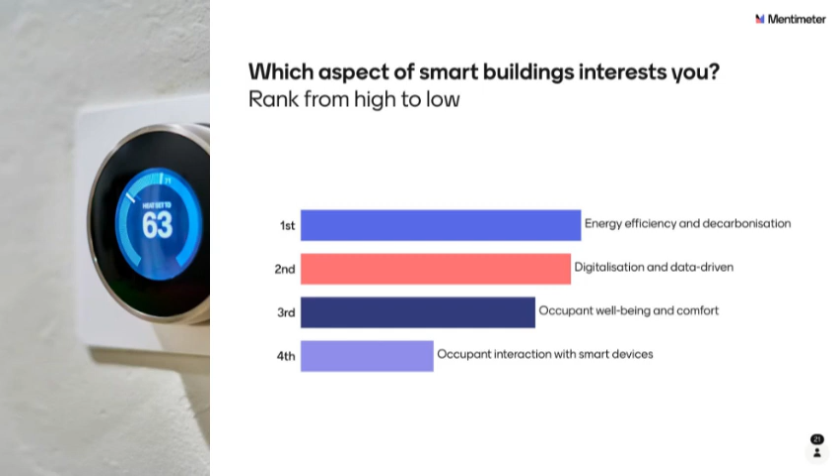Okay, I see 21 people answered the poll. In any case, the first position is for energy efficiency and decarbonization, which is quite expected, at least from my side. The last part is occupant interaction with smart devices, which in any case should be taken into account by our project. And of course, digitalization and data-driven solutions are at the second place as for your interest.

Okay, thank you. Then we can move to the next question: what is, in your opinion, the biggest challenge in making buildings more energy efficient and smart?

We can already say that cost and technical knowledge are the most important aspects to take into account, and the biggest challenge in your opinion. Of course, the impact and barrier of the initial cost is something important to consider. I said at the beginning that there are millions of buildings across Europe that could be digitalized, so this could represent a very important starting cost and barrier. But technical knowledge is also quite important in addressing digitalization. Today we are going to address this mainly, the technical aspects, but of course taking into consideration the costs of interventions.

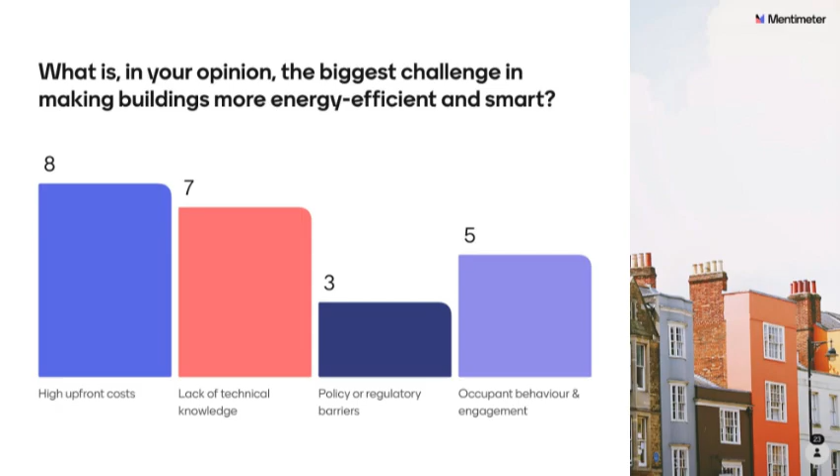Okay, next and last question for you: have you ever implemented smart technologies in a building project? The answers could be: yes, extensively; yes, but only in pilot projects; no, but I'm planning to; or no, I'm here to learn more.

Okay, we reached 23 voters. So this is the situation: we are still working and piloting these solutions, not only in our 3 projects, but I suppose in many others that you are participating in.

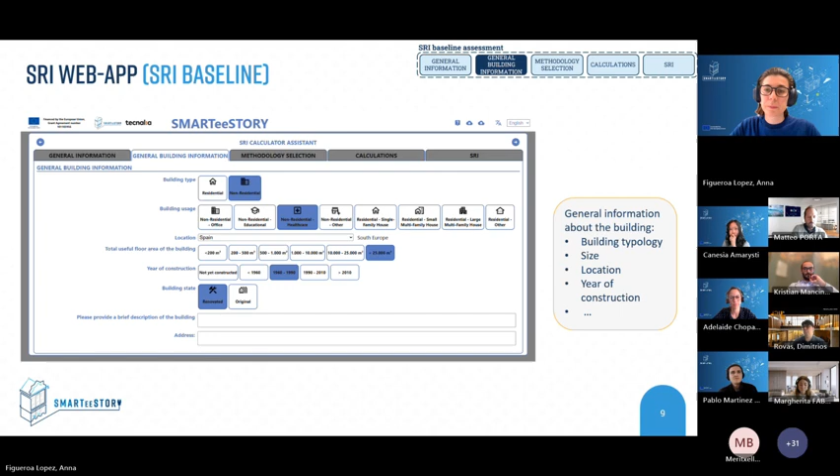Then the user has to select if the domains that are part of the SRI methodology are present in the building or not, and if they are also mandatory or not. Next, for each domain, all the Smart Ready services are filled based on their main functionality level and share of the building that is applied.

Finally, the overall SRI score is shown by the total SRI, its class, key functionalities, impacts, and domains. This facilitates the full interpretation of the SRI score. From here, the user can download a full report showing these results, as well as directly go to the next module, where the generated proposed solutions are.

Here, the second module includes this novelty part, where the refurbishment strategies to improve the SRI score are integrated. The web app loads automatically the scores and information from the evaluated building in the previous module, the baseline. The domains are then automatically sorted from lower to higher scores, so it facilitates the user to focus on which domains could improve the most.

And instead of all 7 impacts presented in the SRI methodology, they are grouped as key functionalities: building, user, or grid. From here, the user selects their own preferences on what impacts and domains to focus on to generate the proposed solutions.

In this tab, it shows all the possible solutions that increase the SRI based on the user preferences. From here, the user can create as many scenarios as they want with the same preferences. Then they must select those solutions to evaluate the new possible SRI.

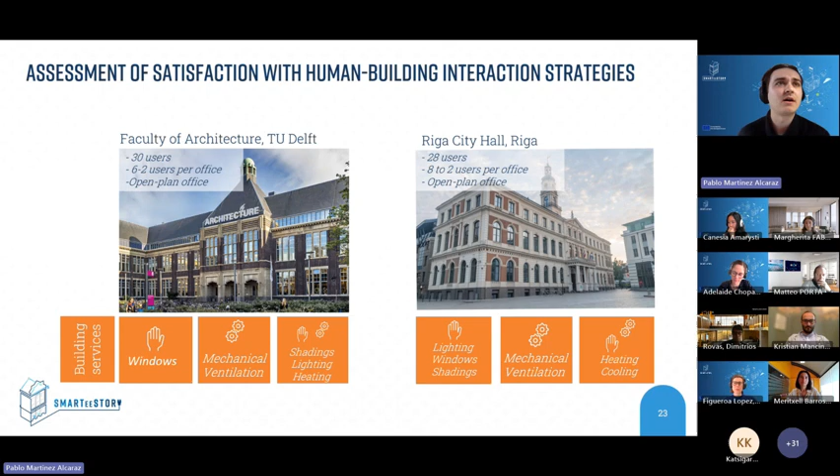In our case study, we did a questionnaire asking occupants to rank their satisfaction levels with indoor environmental quality, personal control, and automation for different building services, and how different influencing factors might be affecting that satisfaction. We looked at access to control, the inherent preferences occupants have, and the social norms and dynamics that might happen in a shared office space.

With this framework, we were able to see that satisfaction with automation is highly linked with access to control, and we observed this in both demo sites.

Another insight from this study is that satisfaction with personal control is highly linked with social norms—dynamics like democratic approaches that sometimes happen in an office space to select the set point of the thermostat. So those dynamics are the ones triggering satisfaction with personal control.

In this case, we might think about gamification strategies or other smart approaches to find an agreement for interacting with building services.

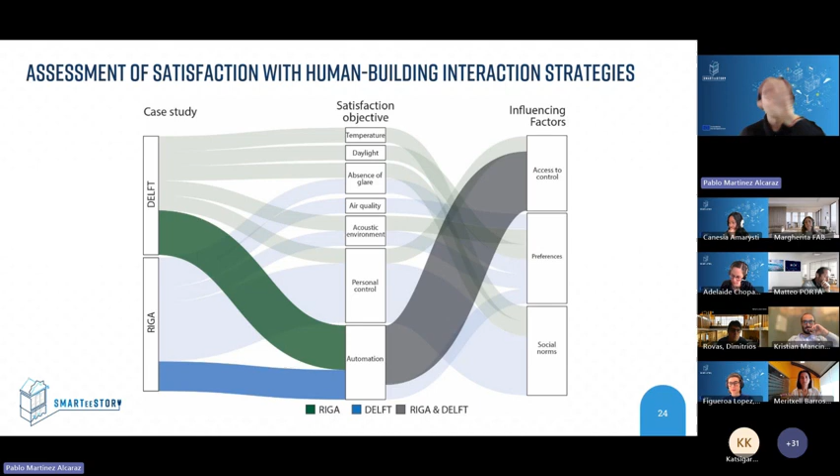So in this part we focus on human-building interaction with interfaces. The other aspect we tackled in the project is how the automation—the control logic that controls building services—is aligned with users. Because if we are optimizing for energy and comfort, and the occupant tends to override the system, we might lose those objectives. So we want this control logic to be aligned with occupants.

This is just a diagram of how control logic works, but I saw that many of you are familiar with these technologies. So let's say we have sensors, actuators, and building services, and then a controller which has some policy design, which can be designed by an engineer, a technician, or by means of AI itself, in order to take actions in the space to improve energy efficiency and comfort, or whatever aspects you want.

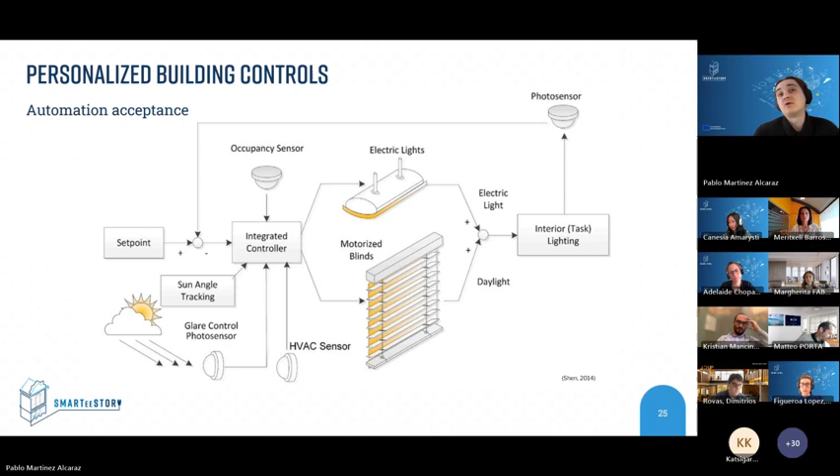Just to show you briefly a study we did: in an office space we might face many different occupant needs, different people with different requirements. So we tried to test if some of those requirements were similar to each other.

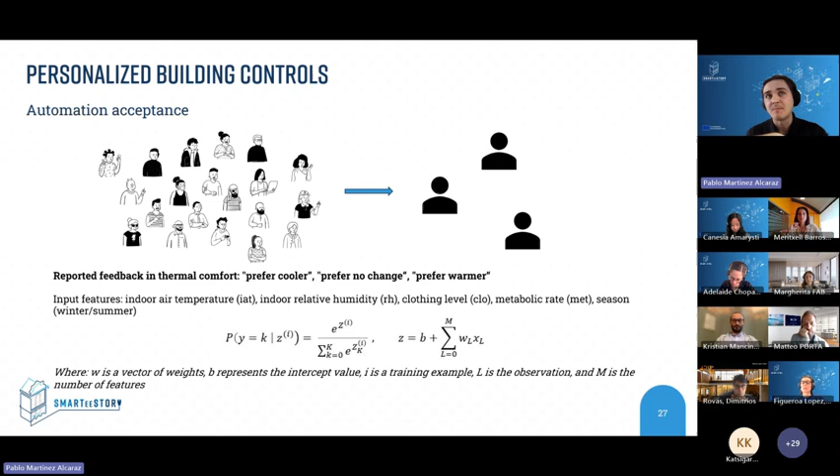We fitted personalized comfort models to see how people had similar thermal demands, and identified groups: the people who are always feeling warm—let's call them the frost followers—the neutrals who are always okay, and the heat handlers, the people who are always cold in the office.

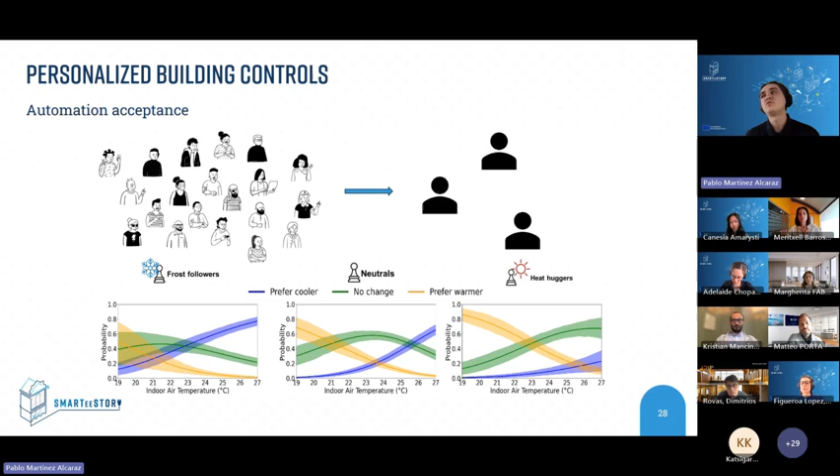So what can we do with this information in a control logic? This is what we tested: a control logic able to identify those three kinds of people instead of treating all thermal responses in an aggregated manner. We ran a simulation to test how this would perform for thermal comfort and energy consumption.

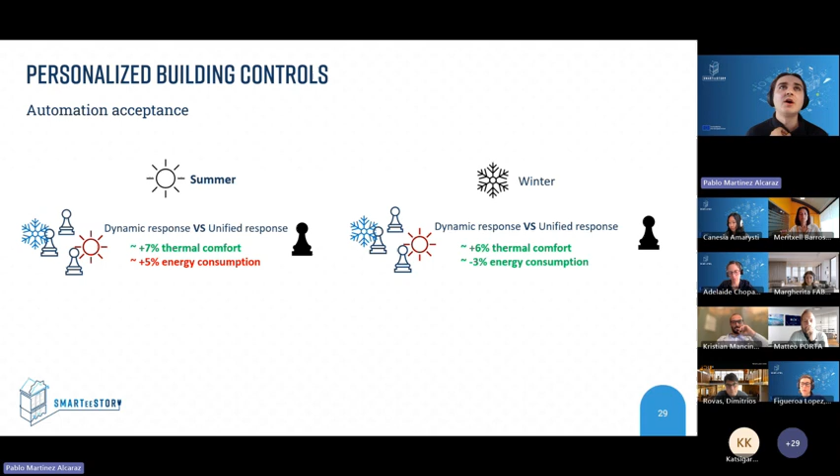In general we see that tailoring thermal conditions for occupants improves thermal comfort, and in winter we also improve energy consumption. For summer, the behavior was slightly different for energy consumption, just because of the set points preferred by occupants. And when we tested this with an energy-efficient scenario, we reached lower values for energy consumption.

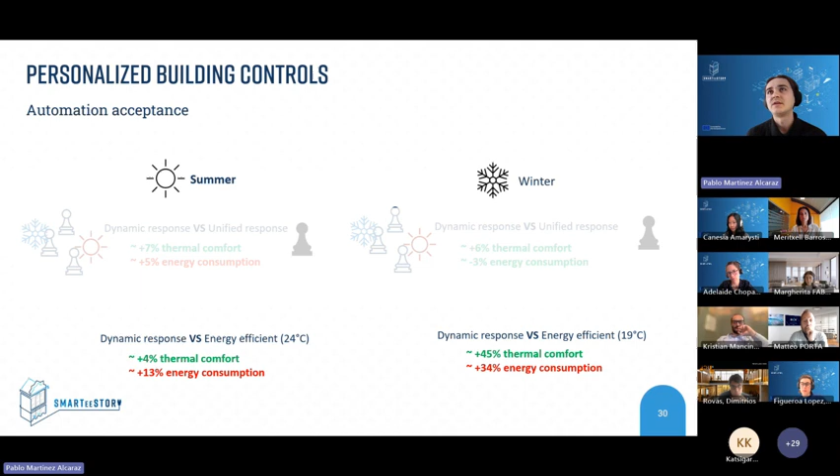This is why it's important to develop multi-objective optimization frameworks that can identify those trade-offs. I'll explain briefly what we are doing now and why this is important, as I think my time is finishing.

Until now we focused only on thermal conditions, but in an office building many building services are multi-domain, and these aspects present conflicting situations or trade-offs. For example, if I open a window for fresh air during winter in the Netherlands, I might get cold inside the office, and this could affect energy performance—that's just an example. Or when controlling settings for glare, I might lose the view outdoors or daylight.

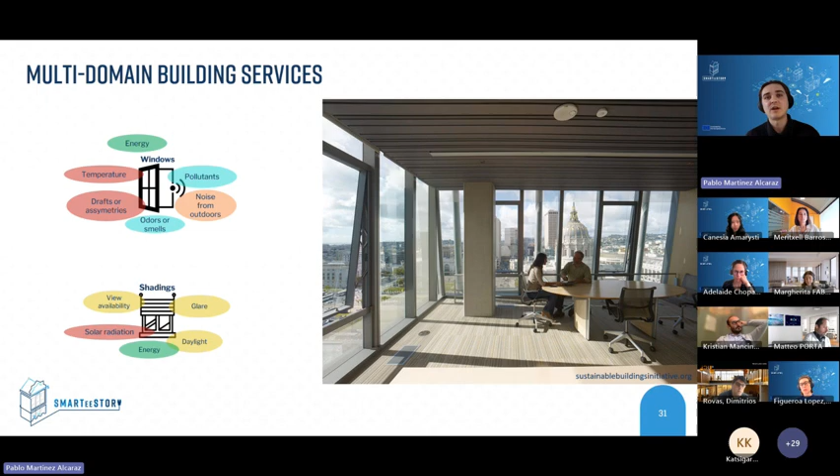So if we need an optimization and control logic that accounts for those trade-offs, we need to better understand how occupants might prefer those situations, because our hypothesis is that occupants have different preferences for different environments in a multi-domain manner. So our research from now on, in this SmartEEStory project, is to understand how those trade-offs or conflicting situations should be taken into account for better informing building controls.

And that's it—we are also open to collaborate. I think there are many experts in the session with us, so let's share insights about these approaches. Thank you.

Thank you so much, Anna and Pablo. You stayed within the 15 minutes. That's great, but you also gave us a lot of nice information that could be inspiring for future activities for every one of us.

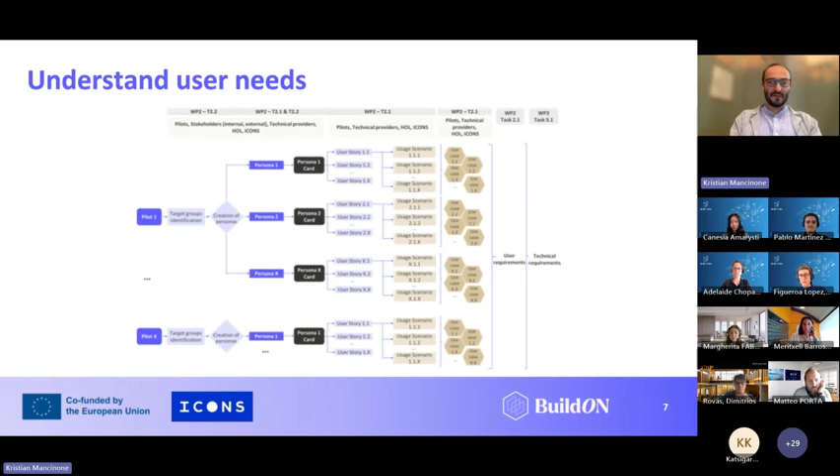This has led us to Deliverable 2.1, an analysis of the different user stories and the requirements that were needed. This was done in the first six months of the project, which led us to really understand the specific needs a user can have in facing the usage of these tools and solutions.

In parallel, we defined social surveys, sending some even to other stakeholders to understand their perspectives on the usage of these digital solutions. Thanks to these integrated works, we defined what we call social innovation roadmaps, which are simple tools — an Excel file in which we put together the different activities we selected to engage people, together with pilot partners and technical partners.

And through this roadmap, we are able to monitor all the engagement activities throughout the project, and to understand which are the specific needs and specific issues related to a single pilot, and then to give technical and pilot partners guides on the engagement strategies. And then we developed a data collection template to monitor the engagement KPIs. So we are not talking about the impact of the solution on indoor quality or anything else, but only on the engagement of the activities.

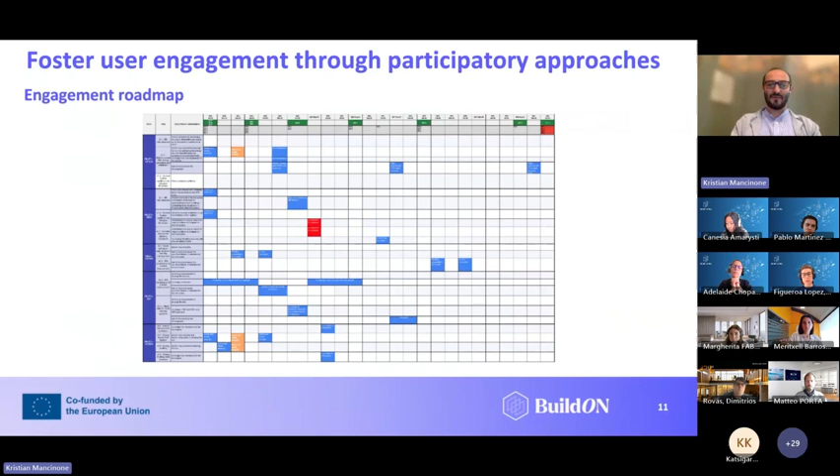So we are not the partner developing and implementing the activity at local level, but we designed the strategies and gave them a how-to guide that helped local pilot partners to carry out these engagement activities such as prototyping and testing, and we designed together with them tools and other things that can be implemented at local level to engage people.

At this moment, we are at month 24 of the project, so we are starting engagement activities after the development of the specific user tools and services, and we will have some results, I would say, in the next 12 months. And that's all from my side. Thank you for your attention.

Thank you. And so the second presentation from BuildOn is focusing slightly more on the technology stack and some of the work that has been happening over the first 2 years of the project.

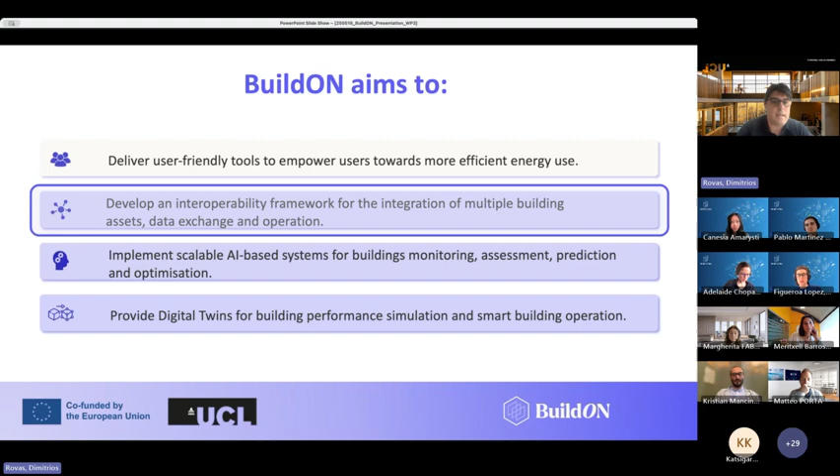So what I would like to focus on, as Kristian mentioned before, is one of the main aims, which is that interoperability framework. To give some context, this is the main idea and our starting point in formulating our research hypothesis and research question. Within a smart building environment, we have different data providers, and there's a huge landscape in terms of data available. This data can come in different shapes, forms and formats, and we need to be able to ingest them and beneficially use them.

Just to give an idea of what these applications could look like, they can be automated fault detection diagnostics, it can be monitoring, but it can also be optimization and control. And BuildOn is focusing very much on that optimization and control aspect.

So what we set out to do is understand how we can do that. And this is not something that is not possible at present - it's actually done at present. The biggest challenge is that we need to do the integration and data access and everything manually and bespoke for each one of the new buildings. So really the keyword here is scalable. So how can we go about doing it and scale it horizontally across a whole portfolio of buildings?

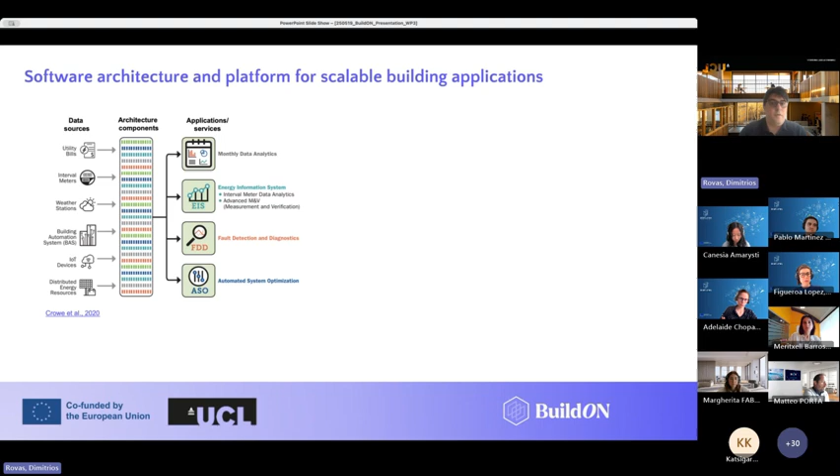And to be able to do that, we need to be able to provide generic methods to access data.

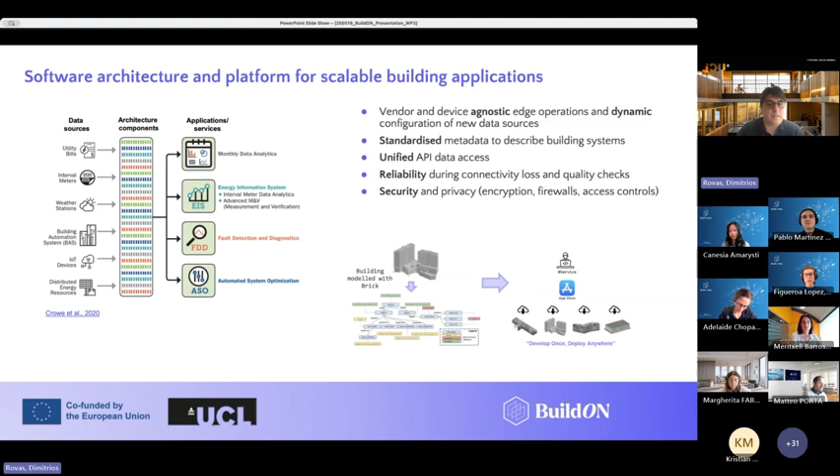We need to have a unified and good representation of the building and its assets. So we need standardized metadata. We need to provide access to the data in a way that hides all that complexity around heterogeneity, and then manage cross-cutting concerns around data reliability, security and privacy. One of the main aspects is this standardized metadata, which we're working on using ontologies that relate to smart buildings, and I'll talk a little more about this.

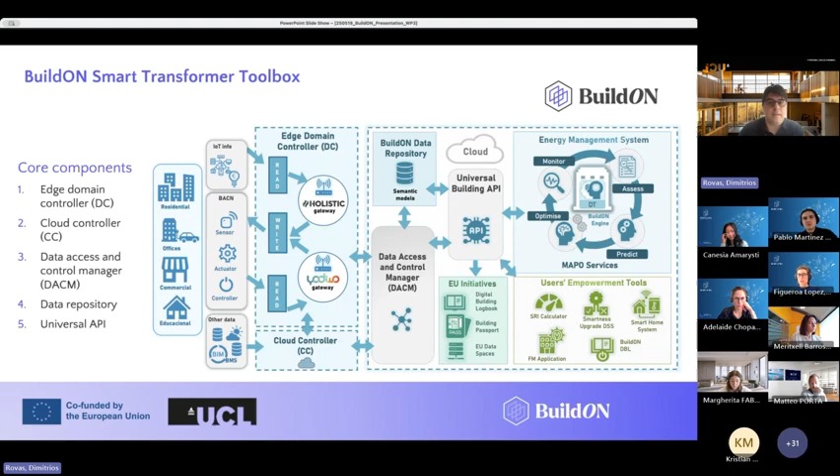So this is focusing now on BuildOn, going into more detail on what we have been developing. Going from left to right, different methods to deploy and capture data from sites and from the cloud, ways to access the data that can be deployed on the edge. Then as we go towards the right, we move to the cloud, upload the data, abstract the data, normalize the data, and then serve the data to applications. So we're looking at an end-to-end development and deployment and testing around different sites.

As I mentioned, this is a technology presentation. I don't have enough time to go into all the details, but there are several papers. If we start looking at how this would look like, this would have a number of technology components: connectors to interface with different data sources, databases to store and provide data, and then equally importantly, APIs that are based on the knowledge graph and the ontologies that can serve and provide the applications.

We have been working within BuildOn and within Work Package 3 developing that software infrastructure, which is defined and described in this paper in short. And then there's a deliverable from the project that gives 100 pages of the details of how that goes about, with the main characteristics that this is a modular, customizable, and scalable infrastructure.

Now, in terms of the testing and the implementation, some of our partners in the project have been looking at the edge devices, going very close to the building and deploying gateways. These gateways provide access to the data using multiple protocols. Then that information can be registered into our data integration platform. This data coming from the building can be accessed, and also information like signals that can be communicated back to the building for control can be written.

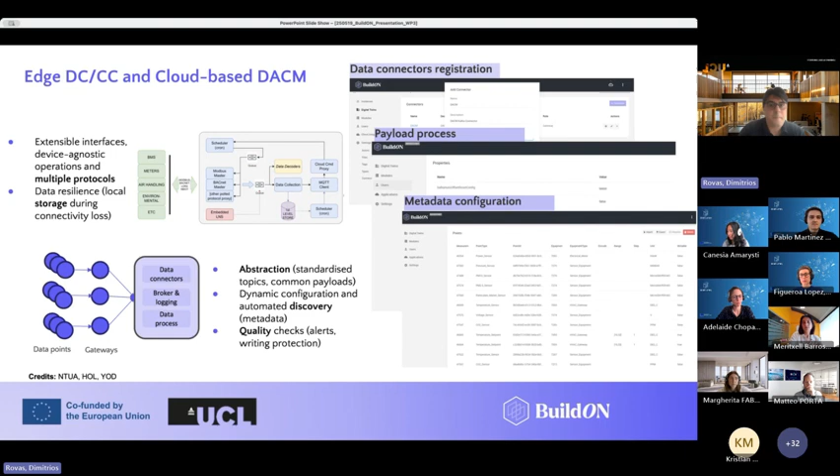A very important bit, and something we have been working on quite a lot within this project, is that we get data in different shapes and formats, from structured building information models to information that might come from other platforms, to unstructured data. So a big challenge is how we can take all that information and create that standardized knowledge graph-based representation.

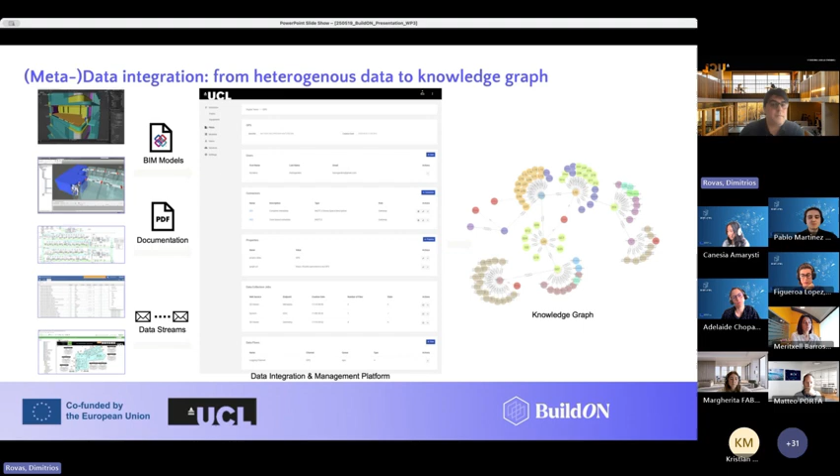Kyriakos, one of the members of our team, has been developing this data integration and management platform that allows us to do that in an automated or semi-automated way.

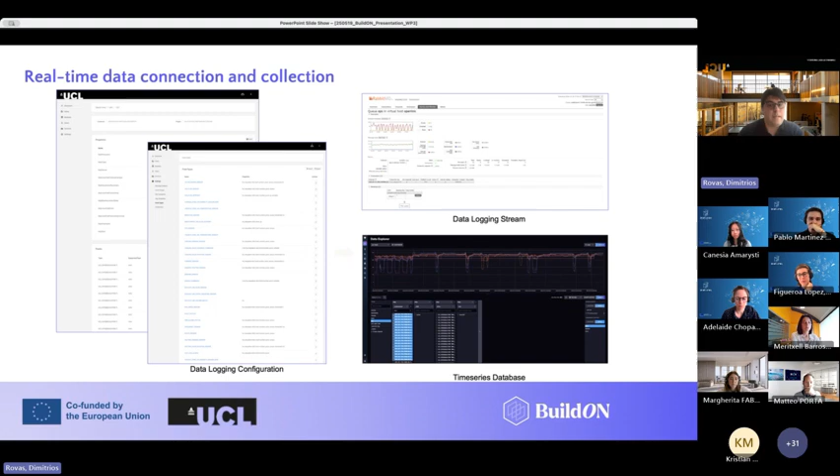Now, once we have the knowledge graph, we can connect to the data and store that information in databases like time series databases. And then we can also annotate this data with the metadata, so create a knowledge graph that comes and combines all the information that is available and generates that single source of ground truth with regards to how the building is represented. And that can help unify everything on top.

Now, when it comes to applications, and this is something we have been focusing on in the more recent period, sometimes working with knowledge graph requires understanding of several technologies. One of them is SPARQL to query knowledge graphs. Another is how to query time series databases like InfluxDB. So we're looking at generating something that is quite simplified and is driven by the structure of the knowledge graph.

This is using a technology called GraphQL, and applications can access data in a very transparent and easy to use way for a software developer, but without needing to understand everything that is happening on the back end. That way they can access any building using a unified interface, and they can control the building or provide control commands using that same interface, without needing to understand many of the details that are happening on the back end.

So over the first two years of the project, we have onboarded all five pilots. And in the next year and a half, what we're looking at is the applications and how we can deliver, through that interface, better control, better fault detection, or smartness upgrading.

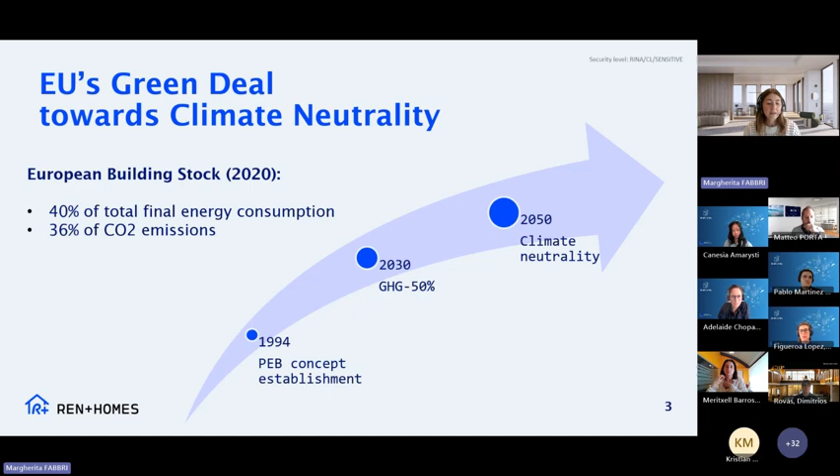Additionally, construction and demolition waste accounts for a substantial portion of total waste in Europe. The European Green Deal set ambitious objectives to reduce greenhouse gas emissions by 50% and to reach climate neutrality by 2050. To reach these ambitious goals, we need to develop innovative technologies for building construction and renovation.

In this sense, a positive energy building is one step above the nearly zero energy building, because in the PEB, energy production is greater than energy consumption, and the surplus can be shared through an intelligent network supporting other buildings.

Ren+Homes' main scope is to develop a universal methodology for positive energy homes and residential buildings to contribute to a sustainable transition by reducing carbon emissions while addressing resource scarcity and energy poverty.

The 7 main project objectives are: to develop a universal methodology considering embodied emissions, circularity of materials and resource scarcity; to select and upgrade affordable key technologies for buildings, for both renovation and new construction; to engage residents in the decision-making process to raise awareness and influence sustainable behaviors; to test the approach in 4 countries in both renovation and new construction; to develop the best financial strategies for positive energy and climate neutral buildings; and to influence the decision-making process at European level thanks to liaison with 15 experts forming the International Advisory Board of the project.

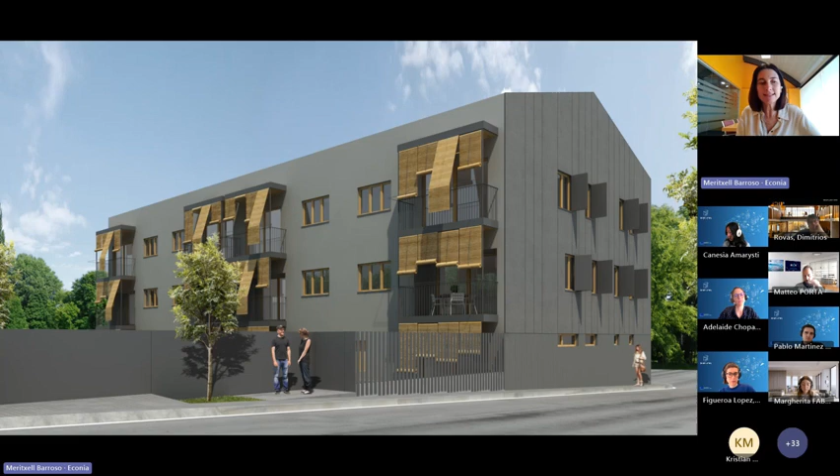Just to start, I want to explain what Evowall is. Evowall technology is an industrialized construction company. We use a custom building system with concrete panels made to fit each project. All our final constructions comply with the Passive House standard, and we use smart tools in all of our processes. I will show you now. Our buildings start from a concept or idea and a traditional design created by architects or engineers.

In the Ren+Homes project, we built our first multifamily building. Although we constructed the entire building, only half of it, meaning 7 apartments across 4 floors, is part of that project. The final result not only complies with the Passive House standards, but is also designed as a positive energy building with indoor comfort conditions and reduced CO2 emissions.

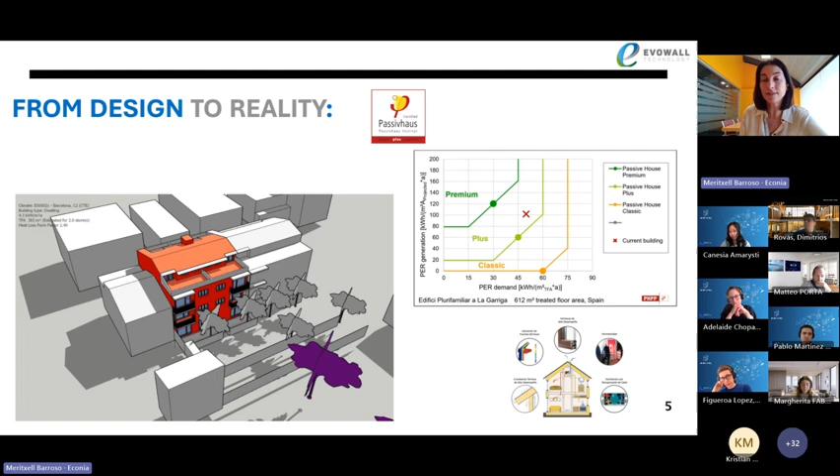To achieve Passive House Plus certification, a number of innovative solutions were integrated into the project, guided by the combined expertise of Evowall and the Consortium Passive House team. Detailed adjustments were made to optimize material selection, ventilation systems, heating equipment, and enclosure design. All of these aspects need smart control after construction. Special attention was also given to the selection of photovoltaic equipment to ensure compatibility with Ren+Homes requirements for a positive energy building.

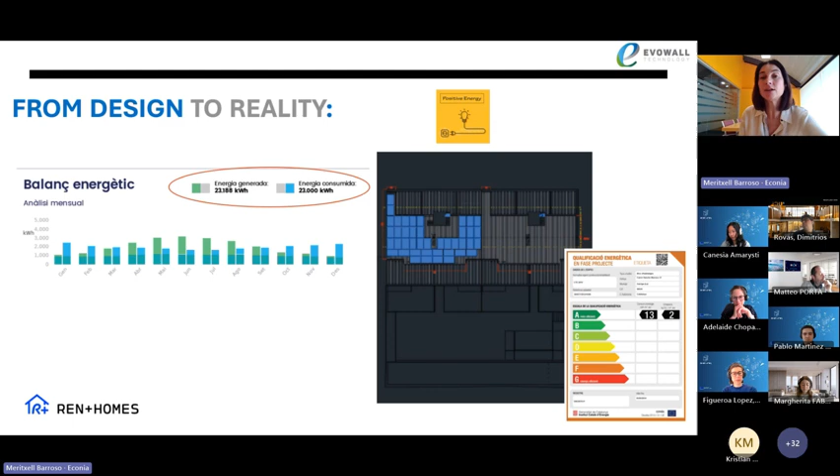Since one of Evowall's core values is the well-being of its inhabitants, bioconstruction principles have also been taken into account. As Pablo said before, when inhabitants use the buildings, it's not easy for everybody to understand how the passive house works, or how the controls work.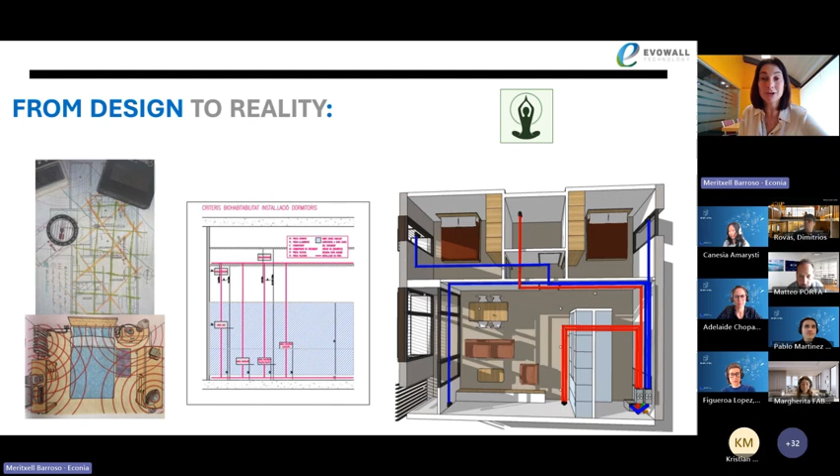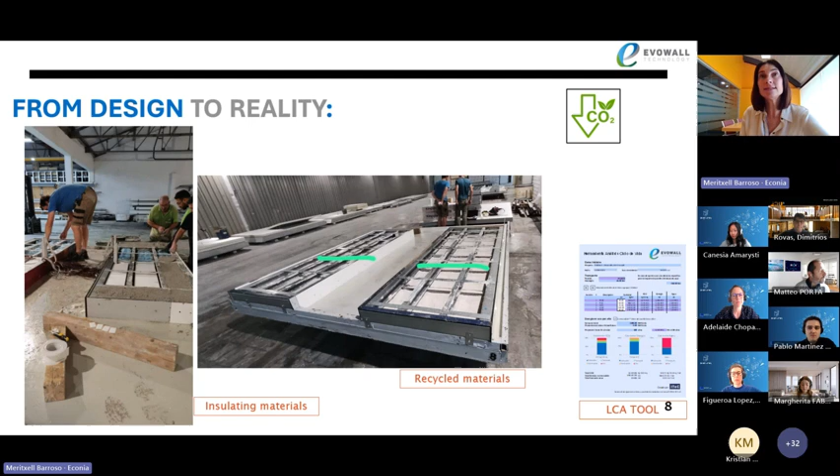More than that, in the Evowall project, reducing emissions was a key goal. We researched how to use recycled materials and create new insulation for our panels, together with ITEC, the Institut de Tecnologia de Construcció de Catalunya. We developed a tool to measure the environmental impact of the panels, in the construction process, and also when inhabitants are using the building.

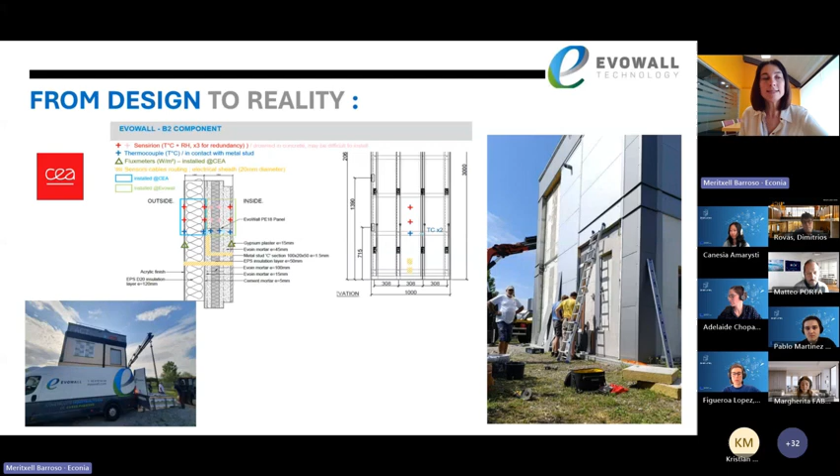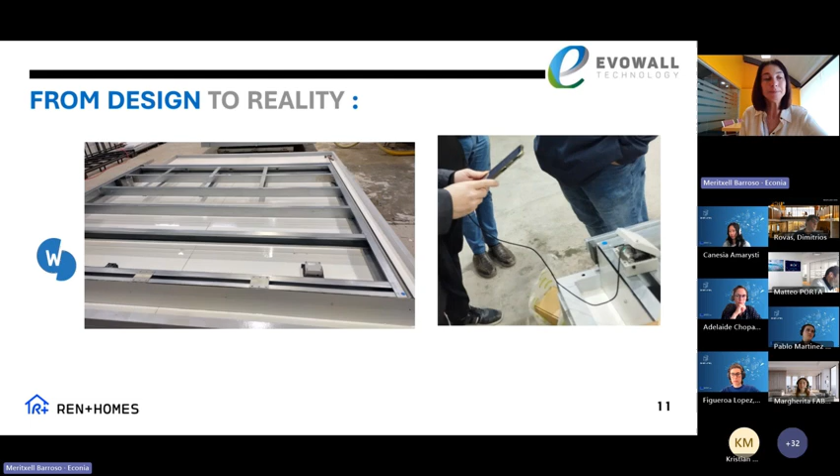We collaborate with other partners during the design phase to improve the technical development of the project. With CEA, we studied different insulation materials. With Wall Sensing, we planned the use of monitoring panels and building movement. With RINA, we worked on the design of safety sensors for workers, as well as environmental pollution sensors.

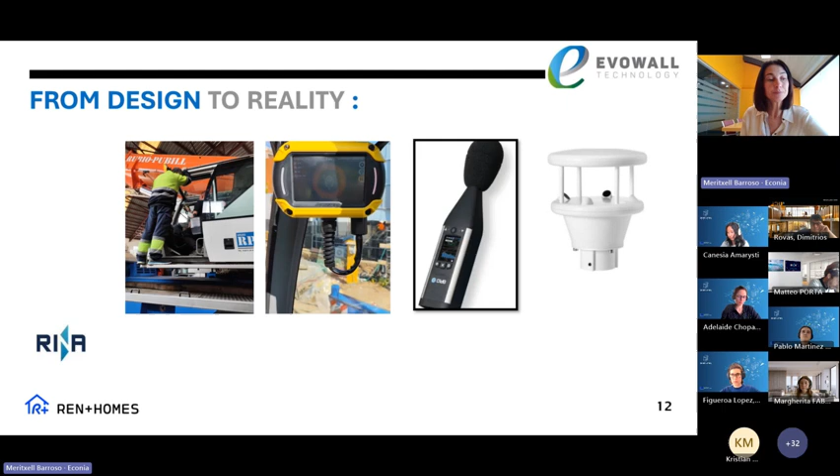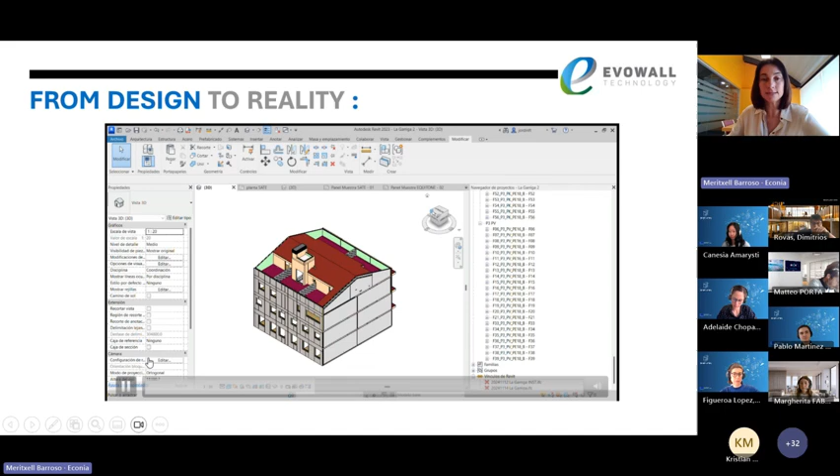When all those aspects and the final design are defined, the project is divided into the components that will make up all the panels. We use different technologies to create a digital twin and ensure full traceability of every component.

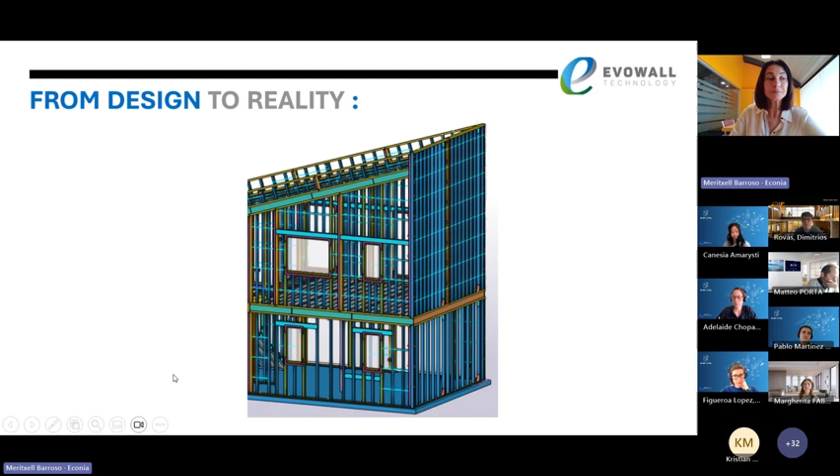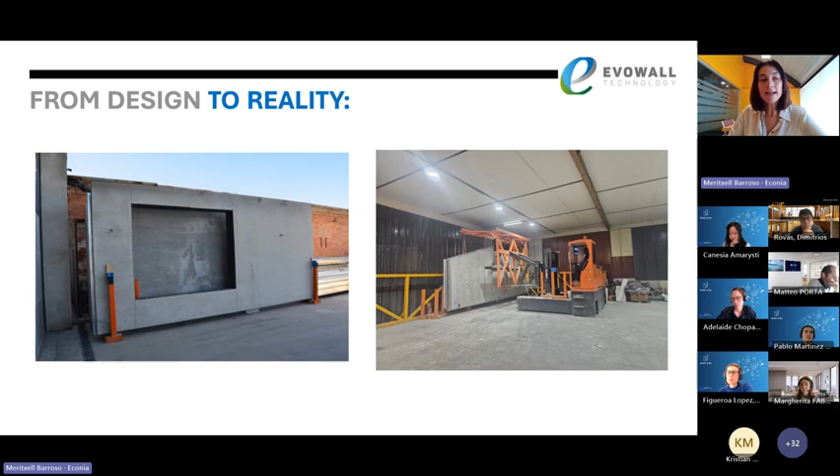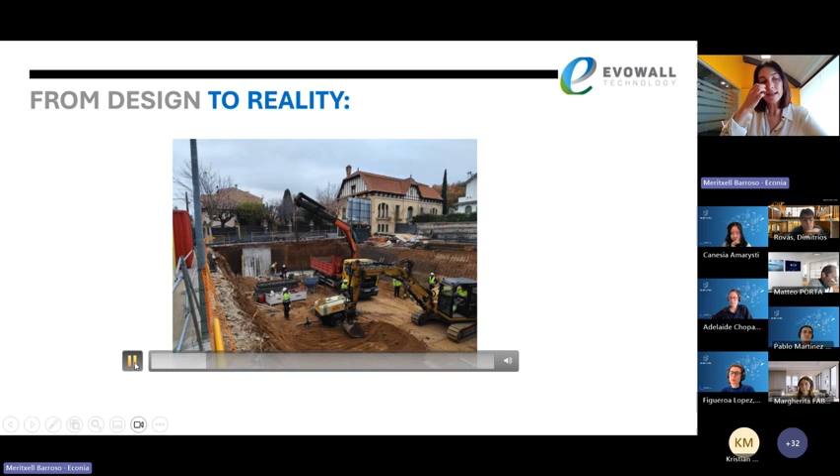Then, when the design is finished, we start manufacturing the panels. They already include pipes for electricity and water, plus the metal structure. It's panel layers of plaster, concrete, and insulation. The panels are delivered to the site in a way that optimizes transport, and the build starts for our construction system.

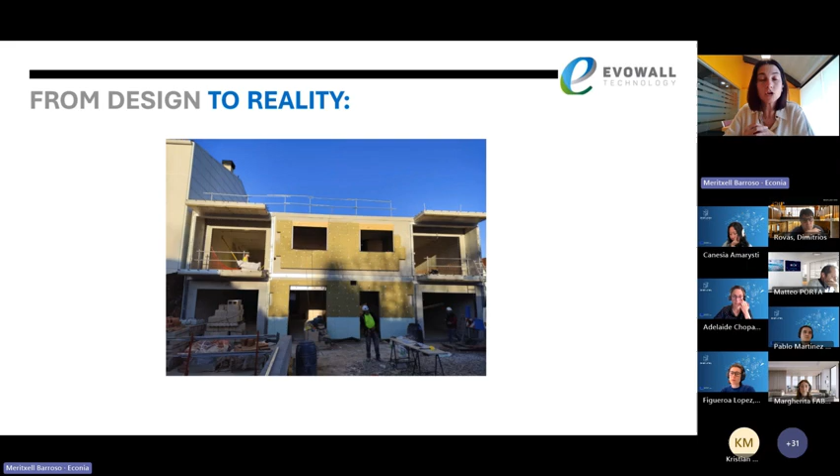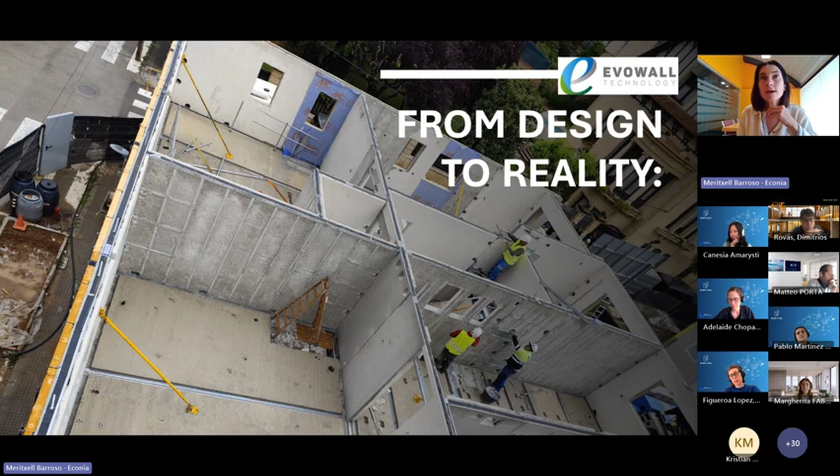So finally, the reality is coming. We design one building and then we make it reality. This is nowadays our construction at the demo site in La Garriga for Ren+Homes, and this is the actual building, how it is.

As most of you say, smart tools are not used only in the construction system or for traceability. The inhabitants have to use and understand how to use that, and they have to use it in a clever way. So it's important to enforce and make it possible that the inhabitants understand the smart systems.